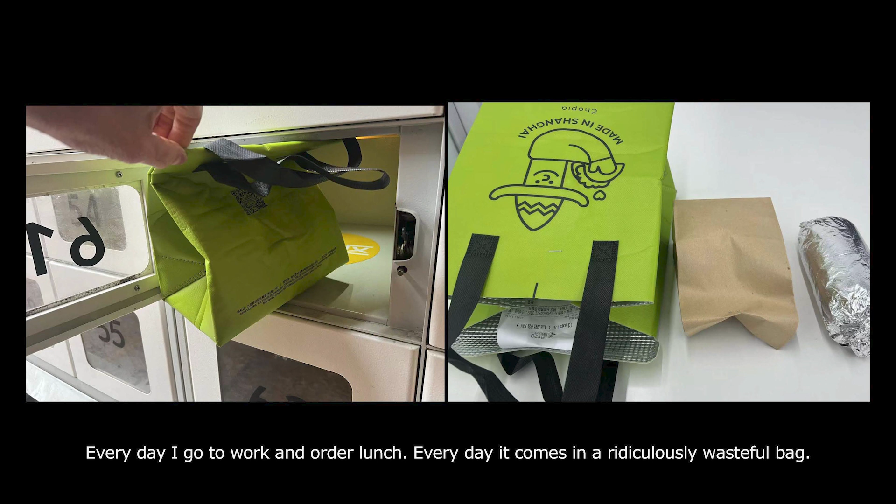I feel guilty. Every day, I feel guilty about waste. It is everywhere. Personally, I create so much of it. Every day I go to work and order lunch, and every day it comes in a ridiculously wasteful plastic bag. When I ride on the airplane, I wake up to this meal, and I can tell I'm not alone in my guilt.

Our lives are full of graphic symbols and inaccurate labels to make us feel less guilty. We pat ourselves on the back to just get the waste in the bin. But where does it really go? I needed to find out.

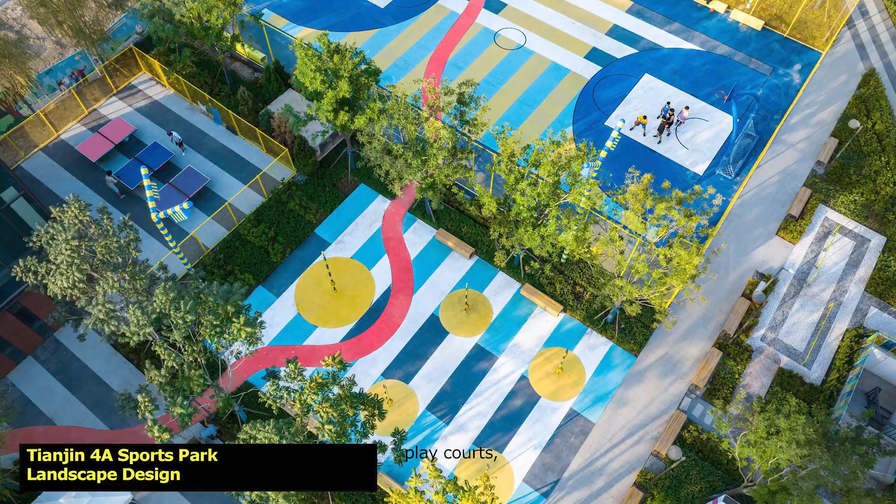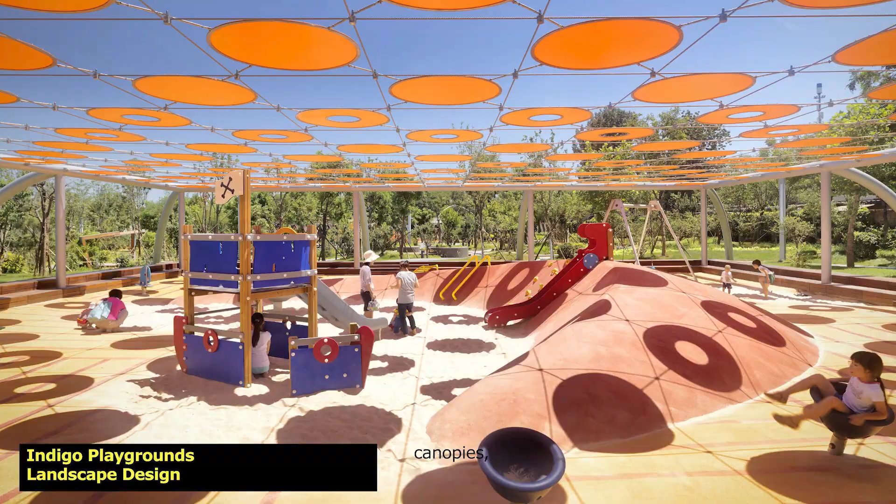In 2018, my company and I began to work on the problem of waste. We are a landscape and architecture studio called Ballistic Architecture Machine, or BAM. We are architects, landscape architects, artists, designers, and we try to be good business people. Our studios are in Beijing, Shanghai, and New York. For the last 15 years, we have designed parks and pathways, plazas, play courts, waterscapes, neighborhood parks, amphitheaters, landforms, slides, playgrounds and canopies, facades, tea houses, waterways, parterres, gardens, and allées.

Why should landscape architects deal with waste? It's a good question. Why is it even remotely our responsibility? To answer it, I want to go back to Frederick Law Olmsted, also known as the father of American landscape architecture. I want to look at a project we all know, Central Park.

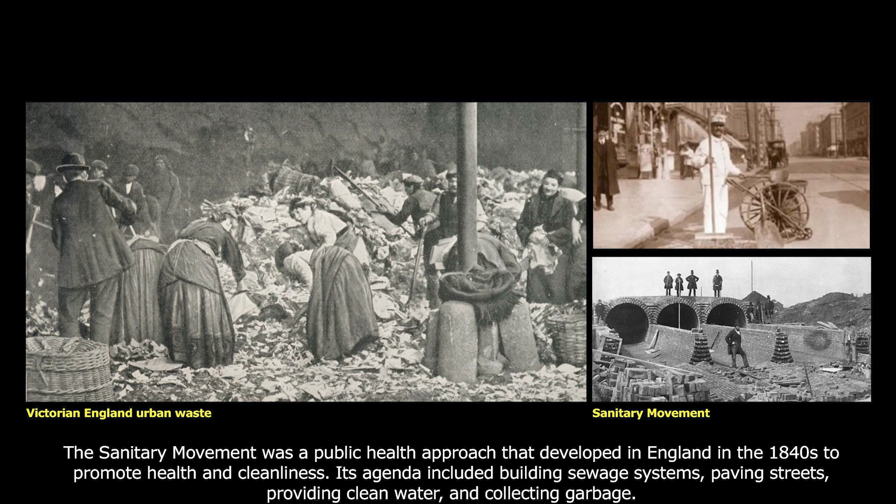What you may not know is that the existence of Central Park and Olmsted's design justification is a direct offshoot of the sanitary movement. The sanitary movement was a public health approach that developed in England in the 1840s to promote health and cleanliness. Its agenda included building sewage systems, paving streets, providing clean water, and collecting garbage. This is a quote from Olmsted's writing in his book called The Highest Value of a Park: Parks are now as much a part of the sanitary apparatus of a large town as aqueducts and sewers. Their management should be as much a matter of sanitary economy and as rigidly subject to sanitary tests.

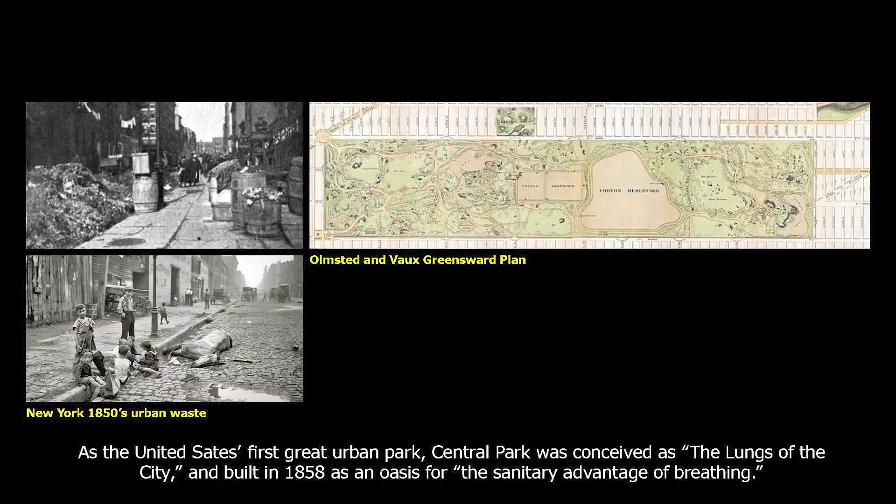As the United States' first great urban park, Central Park was conceived as the lungs of the city and built in 1858 as an oasis for the sanitary advantage of breathing. We associate the natural image of the park with our job of landscape architecture. But we should not forget Central Park's raison d'etre, solving humble problems of urban sanitation. So, Central Park, and even the foundation of landscape architecture as a profession in the United States, was born out of the sanitary movement. What of our purpose?

For landscape architects, I question if nature has become an ends in itself. Have naturalism and design with nature distracted us? We have to admit there is a contradiction here. Our naturalism requires manuals, learned gardeners, continual maintenance. If naturalism takes so much work to get right, are we pursuing the right idea of nature?

This is a quote from a thinker called Timothy Morton. The concept of nature has obviously not served us well. If it had, we wouldn't be here. Here, meaning planet Earth, at this moment, the moment of global warming. If so-called nature and its balance and wisdom had been something that really functioned well as an idea, there would have been no way we would have burned all those fossil fuels and endangered all life on Earth.

When we say we love nature, we mean idealized wilderness. We take out the asteroids and earthquakes. This selective editing is a problem. When we say we can achieve ecological balance through the wisdom of nature, we are also avoiding the dirty, violent, and disturbing parts.

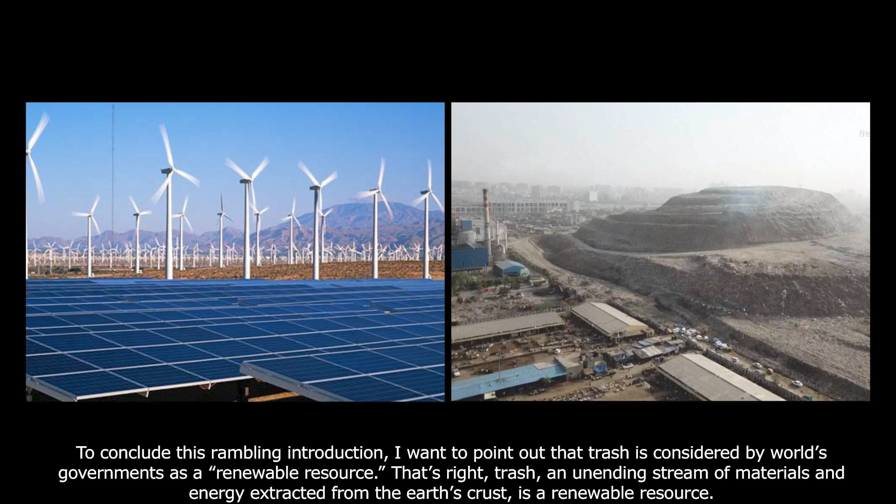To conclude my rambling introduction, I want to point out that trash is considered by world's governments as a renewable resource. That's right, trash, an unending stream of materials and energy that we extract from the Earth's crust, is a renewable resource.

Now I'm going to take you through 3 trash projects in which Bam and I have tried to take on some aspects of the waste problem. This is the first project. It's called Baoshan Waste-to-Energy Plant.

Our first opportunity to work on a waste project came in the form of a waste-to-energy plant, or what we call a WTE. WTE definitely has flaws. It is not an ideal solution, but this is a topic for another talk. Simply put, waste-to-energy works by burning the trash and using the heat to spin turbines which create electricity and transfer the heat into municipal heating infrastructure.

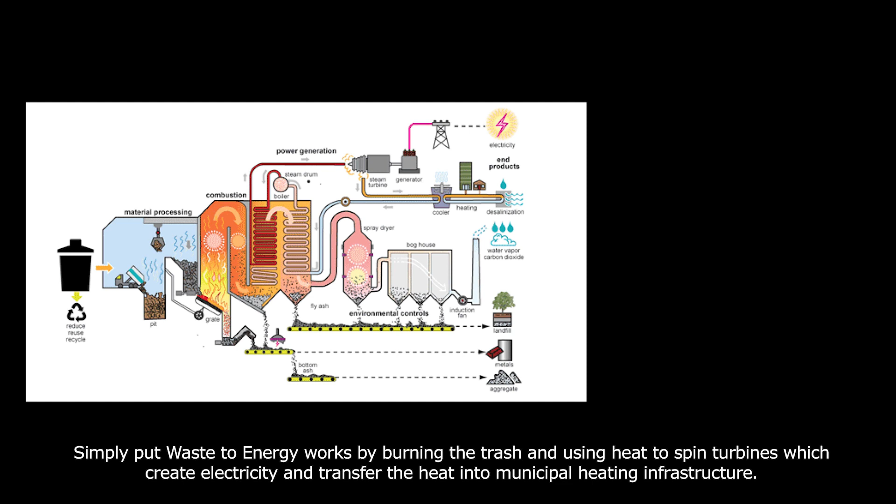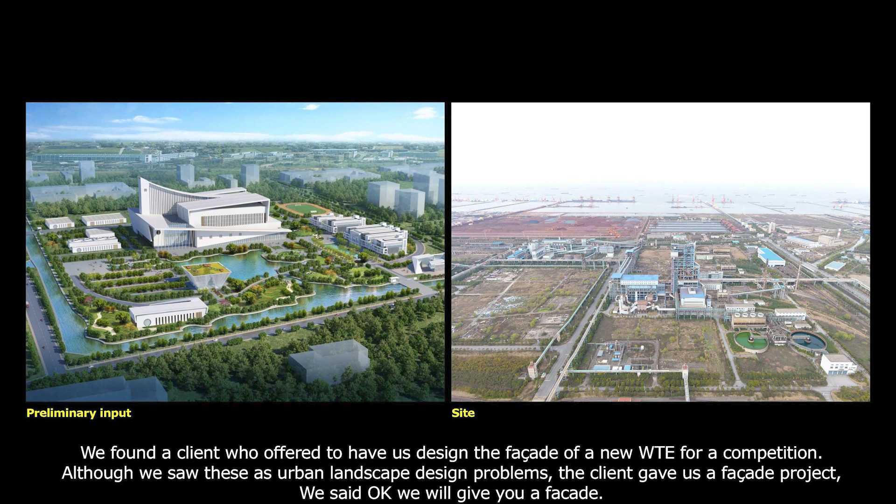We found a client who offered to have us design the facade of a new WTE for a competition. Although we saw these as urban landscape design problems, the client gave us a facade project. We said, okay, we'll give you a facade. So on the left you can see the preliminary input, and on the right you can see the site. So, of course, we started with Central Park.

We came back and said, this building does not look like a trash plant. It's going to need to be a park. We will reuse industrial structures on the site and add the new plant under the park. And we won the competition.

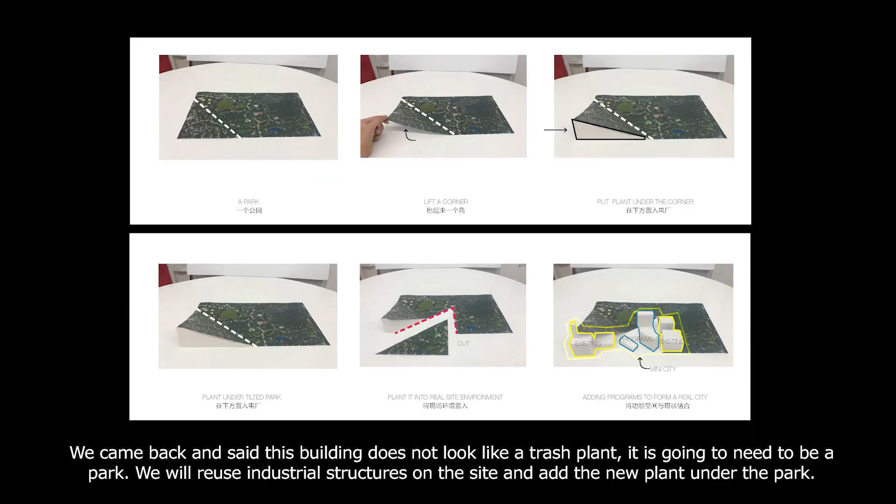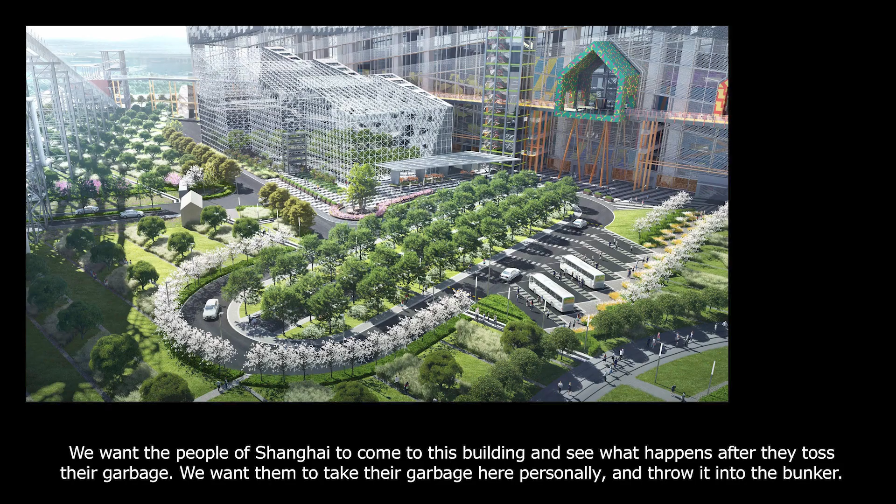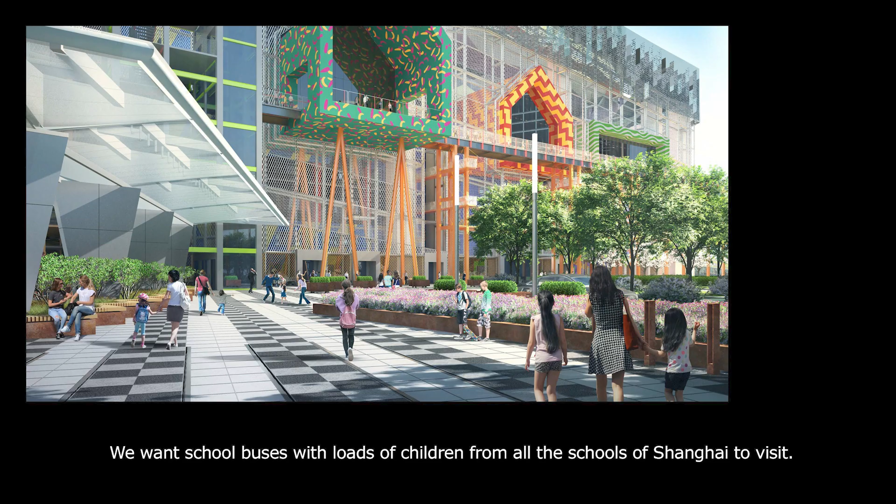After we started working on the park concept, we added an educational component. We wanted the people of Shanghai to come to this building to see what happens after they toss their garbage. We started to envision a mini city of programs, a museum of waste. We want school buses with loads of children from all over Shanghai to visit this site.

So we reorganized the typical plant architecture to integrate 3 exhibition halls and a long glass hallway where guests can walk the length of the plant and observe the entire process.

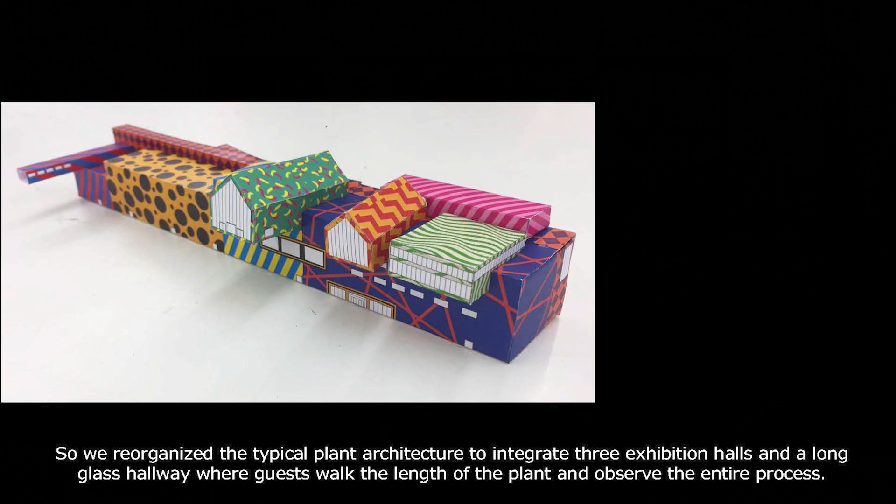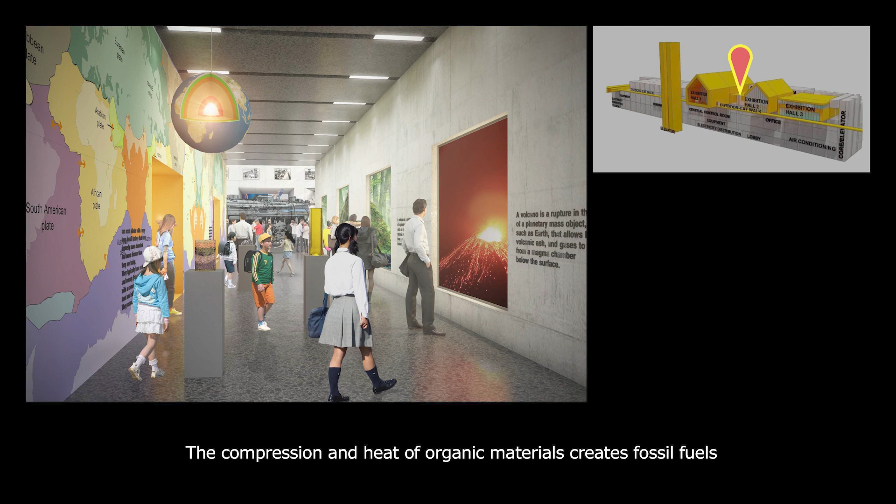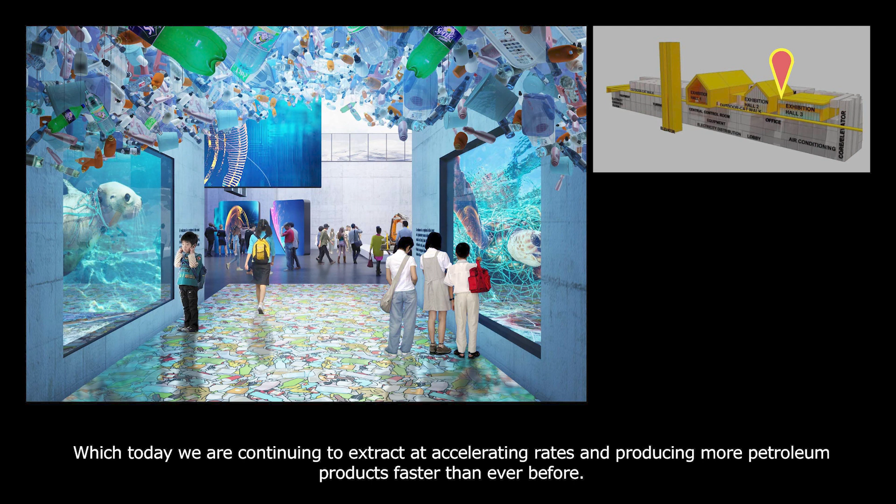Our Museum of Waste starts, as all good natural history museums do, with dinosaurs. The compression and heat of organic materials creates fossil fuels, which we begin to extract and exploit not very long ago, which today we are continuing to extract and exploit at accelerating rates, producing more petroleum products than ever before. We are moving towards a future which may or may not resolve our tenuous relationship with our biosphere.

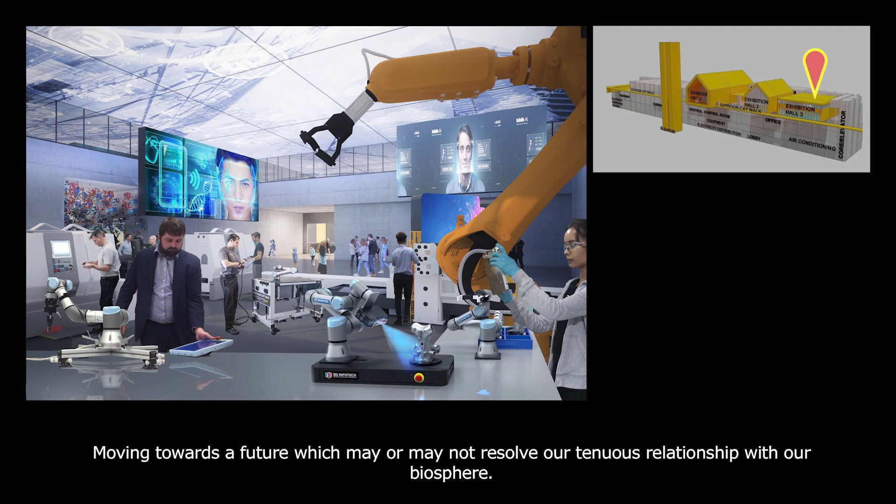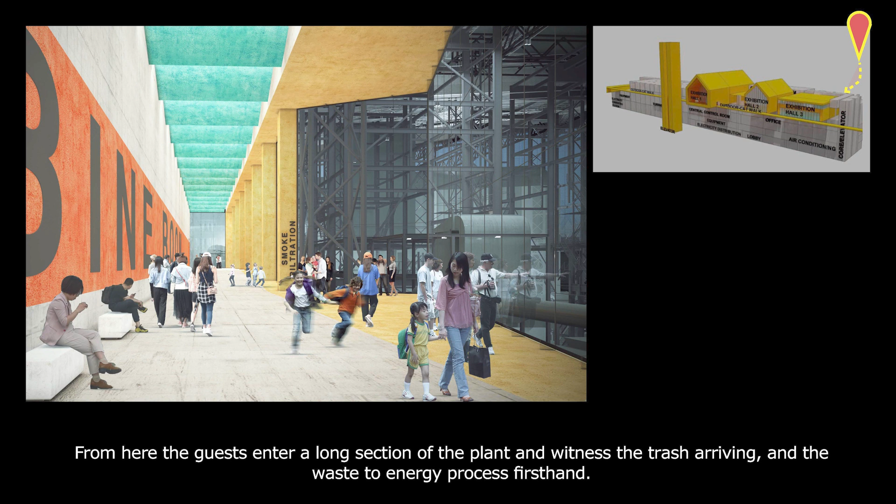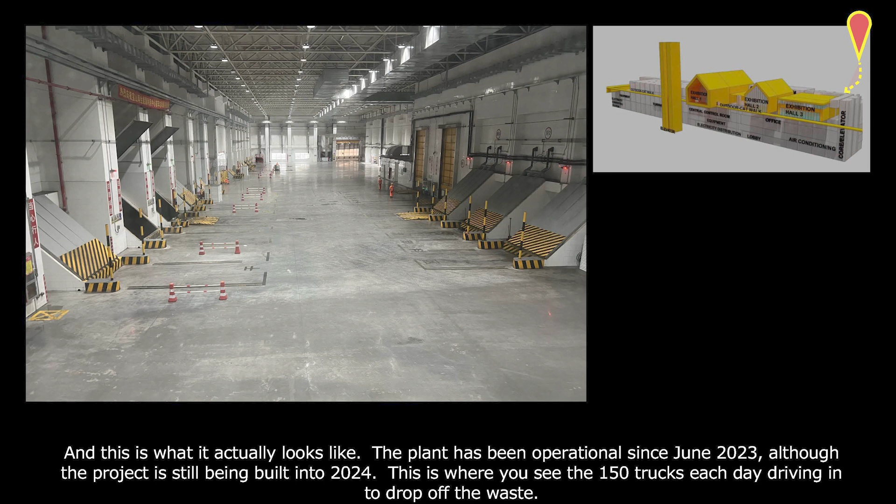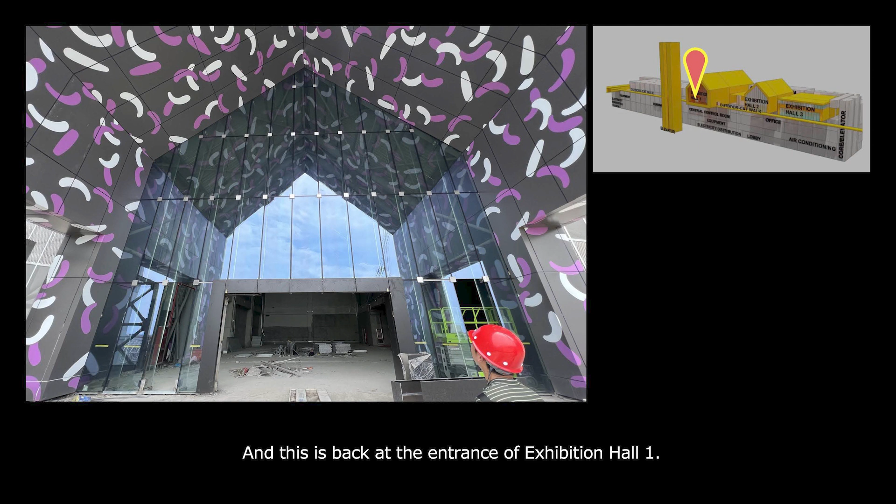This is where you see 150 trucks each day driving in to drop off the waste. This is overlooking the control room where the engineers monitor the plant. And this is back at the entrance of Exhibition Hall number 1. And this is a view of the protruding exhibition hall volumes connected by elevator and catwalk.

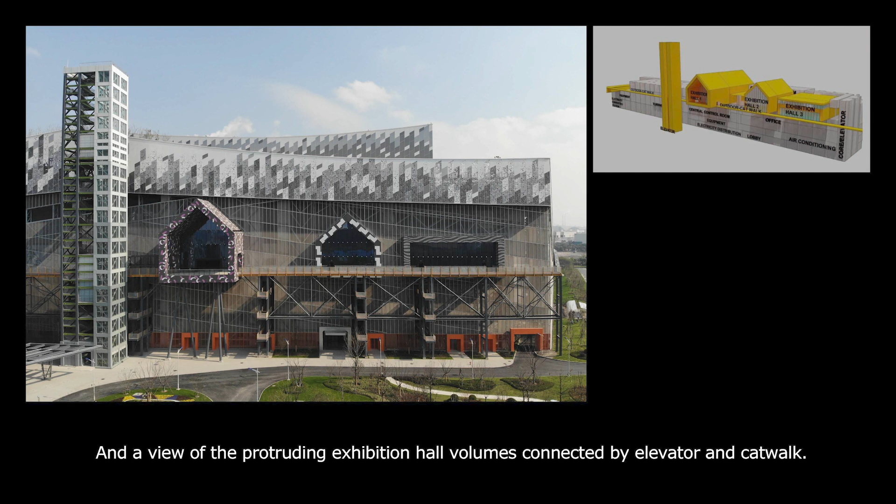To understand how the plant works, let's look at the master plan first. The park idea is overlaid over 2 plots. They're both 35 hectares, and the north plot contains the WTE. The roof has a long span area over the bunker and incinerators, which must be lightweight.

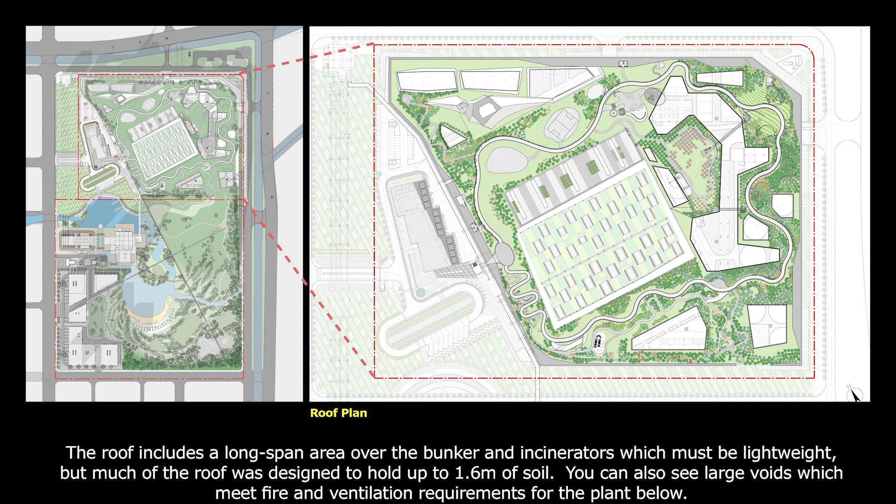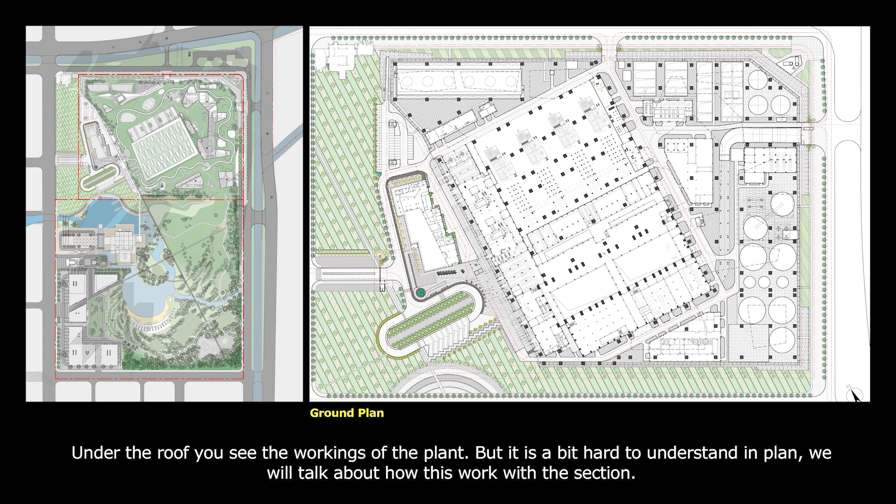But much of the roof was designed to hold up to 1.6 meters of soil. You can also see large voids which meet fire and ventilation requirements for the plant below. Under the roof, you will see the workings of the plant, but it's a bit hard to understand in plan. We will talk about this a bit in a section later. But first, here are some of the zones below the plant roof structure.

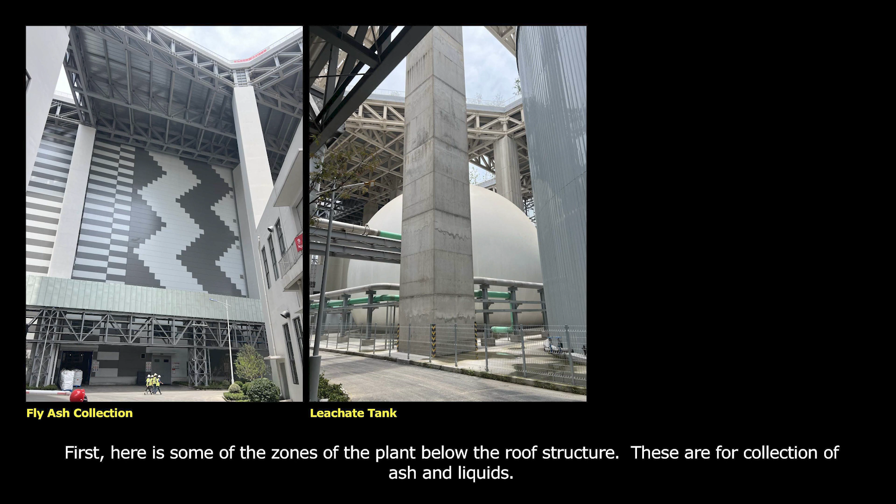These areas are for the collection of ash and liquids. The left image shows the late stage filtration before it's exhausted, and the right shows the chillers, and through the skylight you can see the chimney above.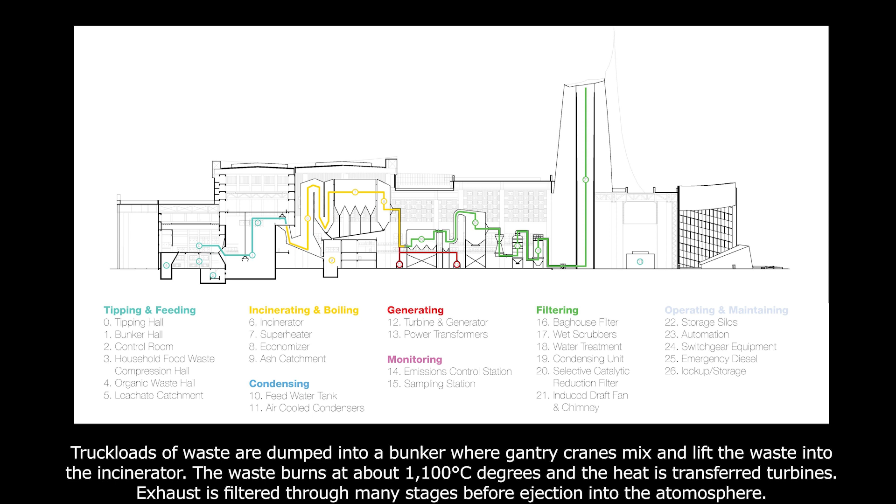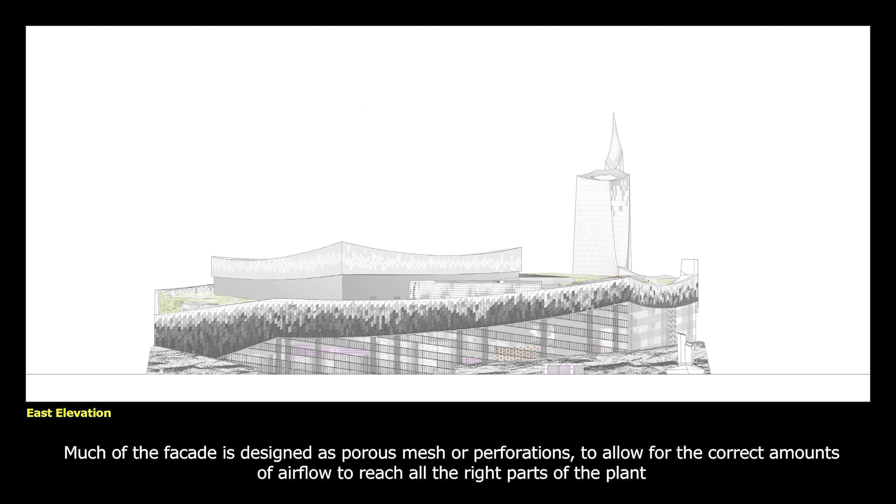We designed the facades of the project from the geological forms and patterns of the mountain-like landscapes. The guest-oriented programs protrude through the facade connected by a catwalk. Much of the facade is designed as a porous mesh or perforations to allow for the correct amounts of airflow to reach all the right parts of the plant. Here you can see the transition of the facade materials and their transparency.

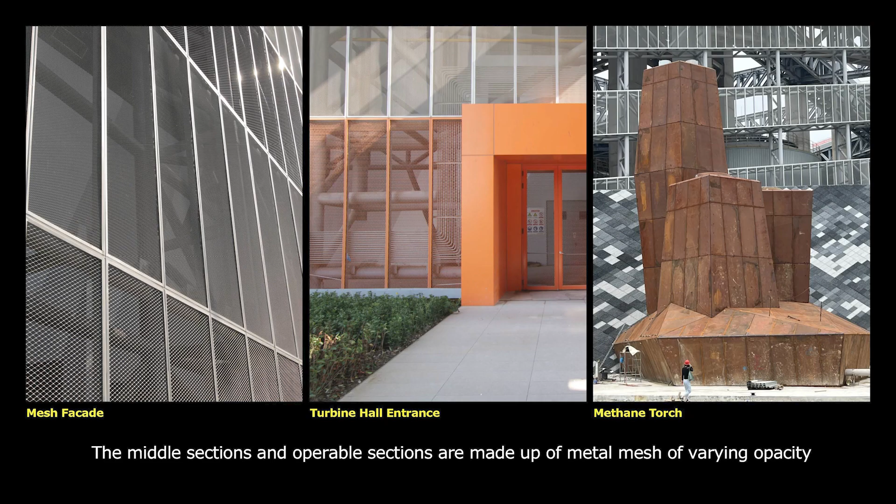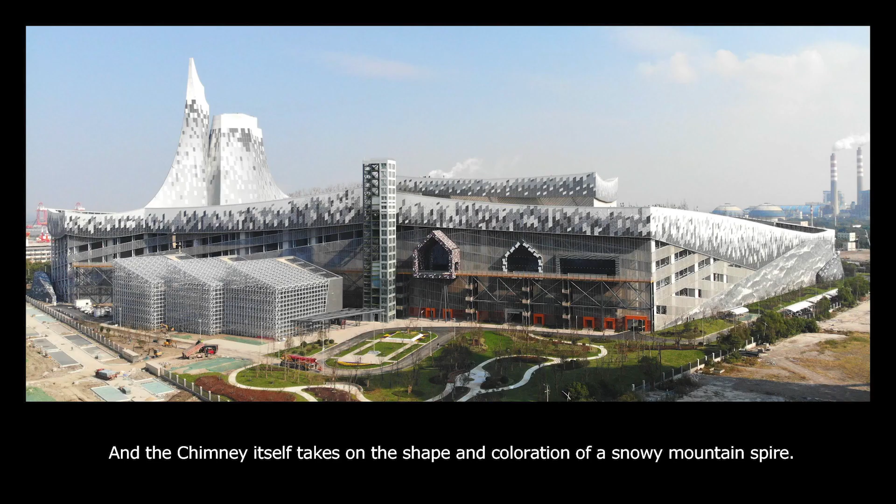The base is made up of a graphic pattern derived from mountain ranges, and it's rendered in cast concrete panels. The middle sections and operable sections are made up of metal mesh of varying opacities. The top section is perforated aluminum panels simulating a snow-capped peak, and the chimney itself takes on the shape and coloration of a snowy mountain spire.

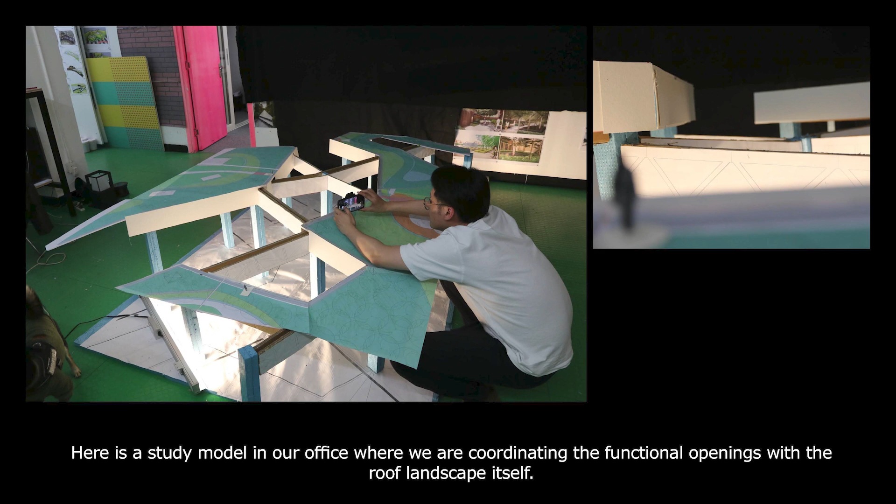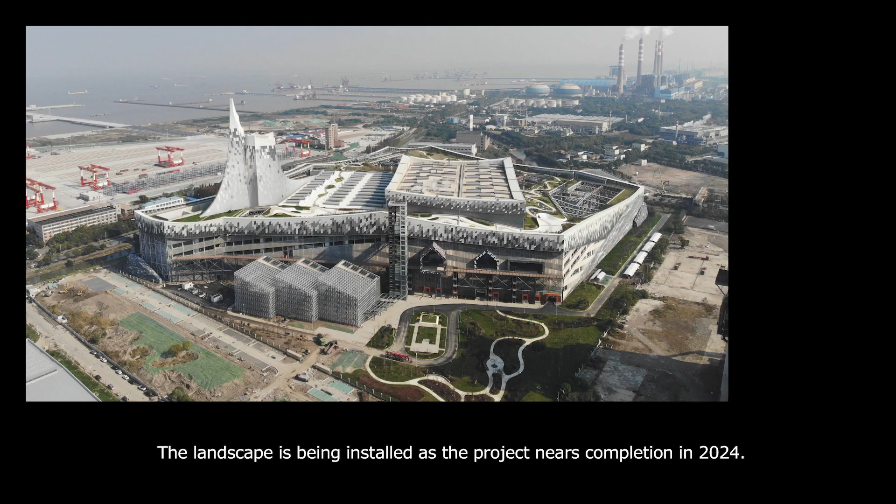BAM did a great deal of study to design the roof structure to withstand loads suitable for large canopy trees. Here we are in the studio studying a model, coordinating the functional openings with the design of the roof. We were able to work with engineers at Arup to come up with a frame solution and decks that met the many requirements of the plant below to be able to design the top landscape layer. The landscape is being installed as the project nears completion in 2024.

The Baoshan Waste-to-Energy project was born from the concept of creating a recreational park as opposed to a waste plant. Ultimately, the project aims to attract future generations to this site so they can smell, touch, and see the role that waste plays in our planet's natural history.

The next project I'm going to speak about is called a circular economy park.

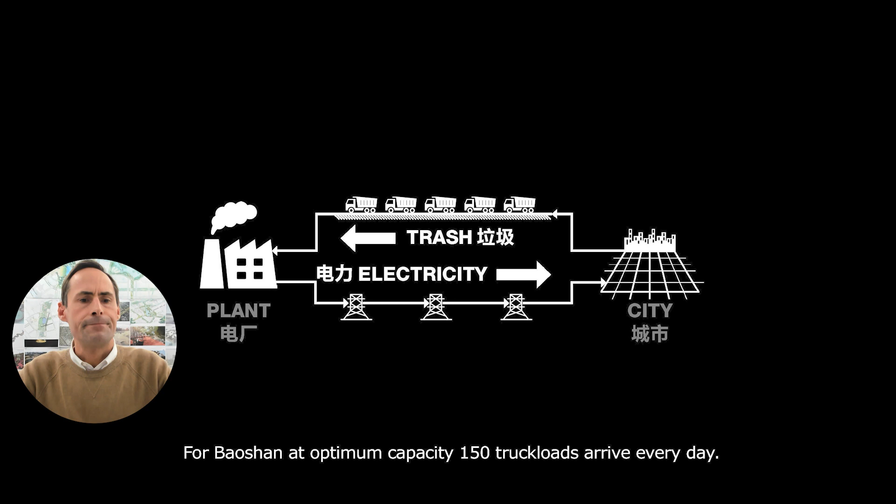Thinking seriously about ecological balance, we learned a lot from Baoshan. Putting a WTE on the outskirts of the city is just not as good as getting it closer to the source. For Baoshan at optimum capacity, 150 truckloads arrive every day. Trucking the garbage is dirty and wasteful, and the transmission of power back to the city center is inefficient. In addition to the CO2 and energy loss, we break the cycle of the source of the trash and its recovery.

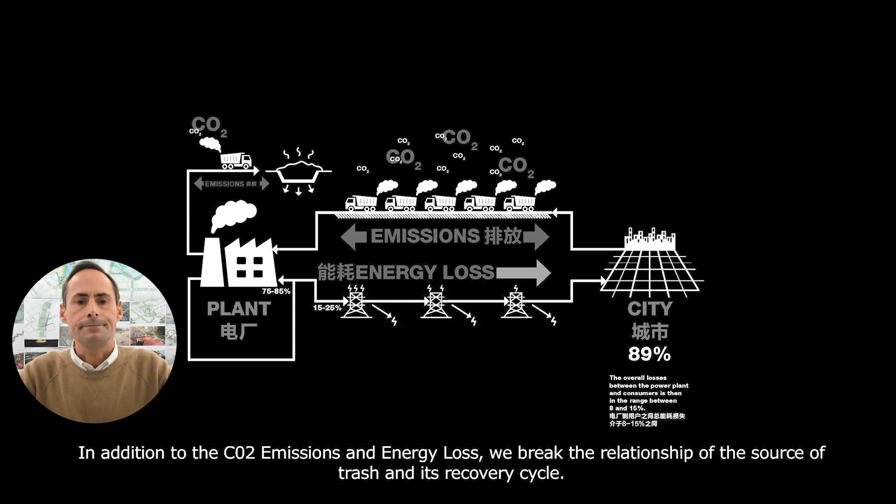We began to seek problems where we could position the WTE closer to the source. The benefits are huge. We found another operator trying to create a WTE for another site which is located within the fifth ring of Beijing. While this is not downtown, it is a central point of millions of residents, a good start to centralizing at a source.

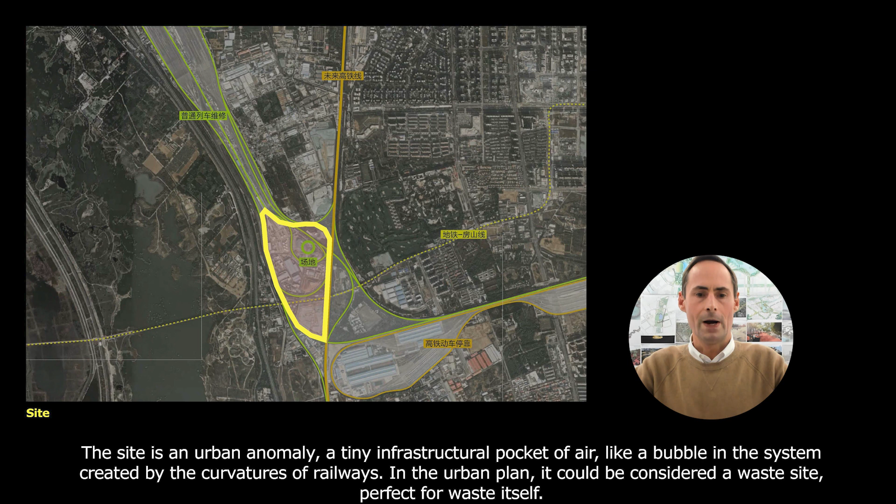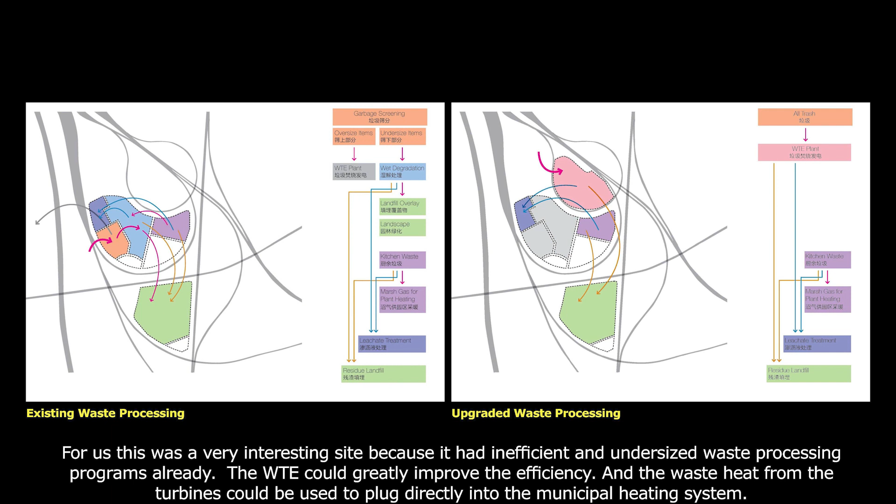The site is an urban anomaly, a tiny infrastructural pocket of air, like a bubble in the system created by the curvatures of railways. In the urban plan, it could be considered a waste site, perfect for waste itself. For us, this was very interesting because the site had already been built with inefficient and undersized waste processing programs. The WTE could greatly improve the efficiency and the cleanliness. Plus, the waste heat from the turbines could be used to plug directly into the municipal heating system.

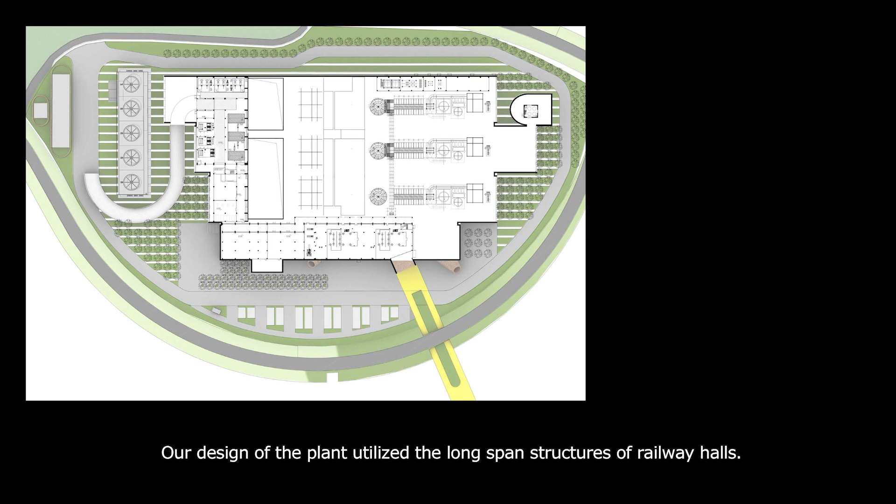We knew camouflage would be key. So we said, let's make this WTE fit into the surrounding railway context. Let's make it into a train hall. Our design of the plant utilized long span structures of railway halls to create a plant which from the outside may appear as a museum or a railway center. The exhibition and guest programs are brick, like some of Beijing's best museums. And viewed from the surrounding roads and rails, the roofs appear as long train sheds.

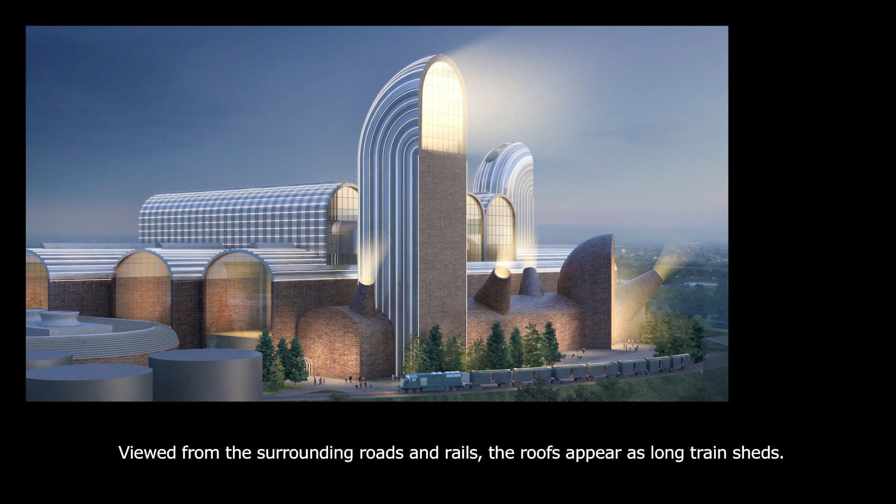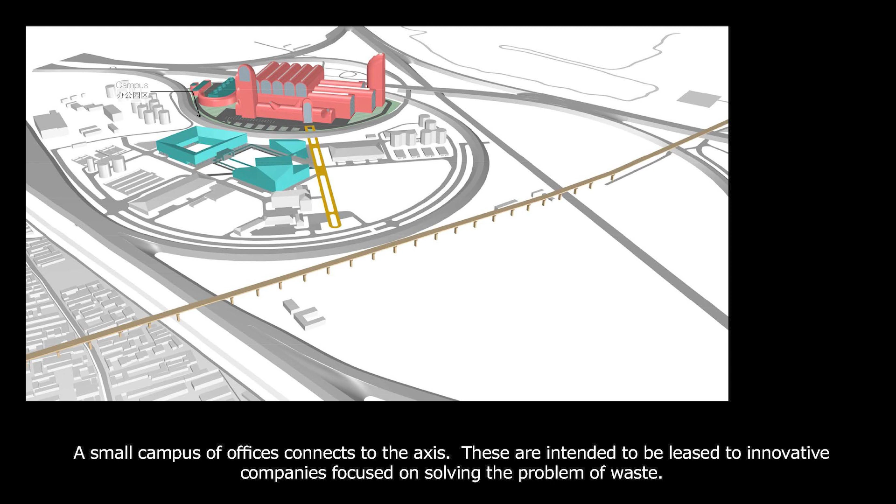Now, the best part, the landscape. We designed the WTE architecture to plug into a new axis we carved through the plot. A small campus of offices connects to the axis. These are intended to be leased to innovative companies focused on solving the problem of waste. The Floating Exhibition Center gives resident businesses a common show space and meeting point, and the axis terminates in a sports park built over the former landfill site.

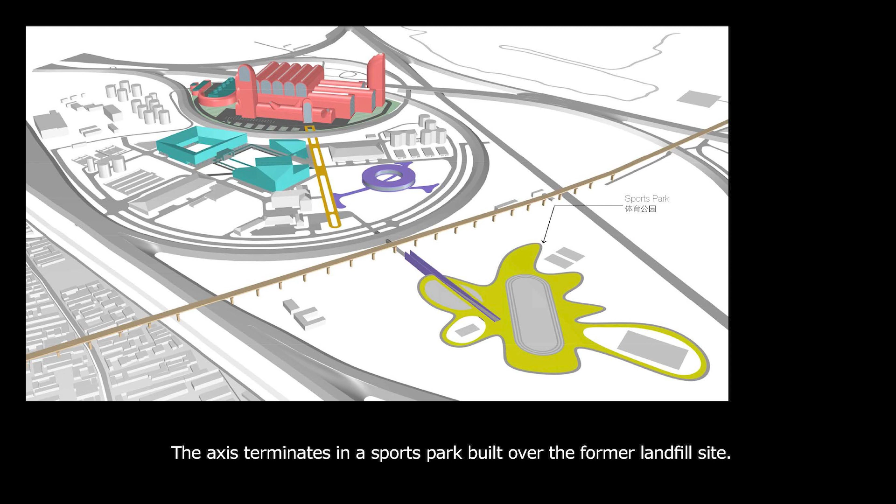We bring in the groundscape and the middle layers to reinforce the spatial design, and finally the canopy layer of the trees. And we arrive at a trash supercenter. Here, trash is a resource sorted for reuse, recycling, and energy extraction. Office and workshop spaces are created to foster creative companies working on waste problems.

And then the whole thing stopped. We literally ran into protests. Nearby residents had learned about the project and were very concerned about the proximity of the waste to their homes, for valid reasons. People were actually brave enough to protest the project. At this point, it was not really possible to communicate why the WTE is actually better than the current outdated waste management happening at the site. People hated the idea of this in their backyard.

We had reached the point that locating the WTE in the city center is not only a technical problem, but also a messaging problem. And this is why design needs to play a role in the waste problem. Sanitation engineers are not trained to deliver compelling messaging, as designers are.

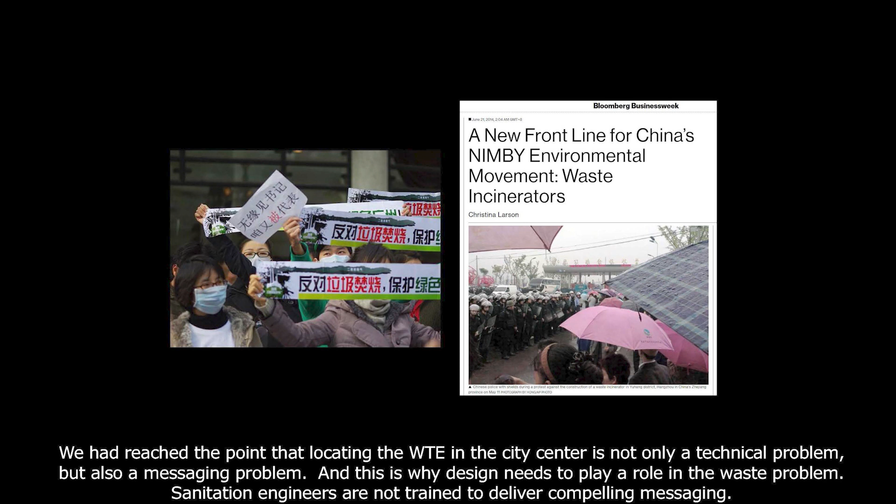When people protested locating a WTE within the fifth ring of Beijing, we said, okay, you don't like it there. Fine, we're going to try to put it in the center of the central business district then. This brings us to our third project, which is entirely theoretical: a waste-to-energy skyscraper.

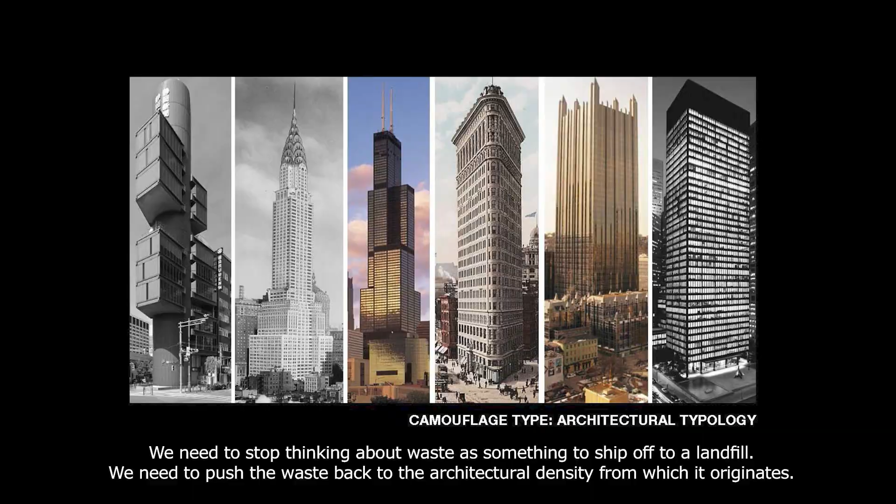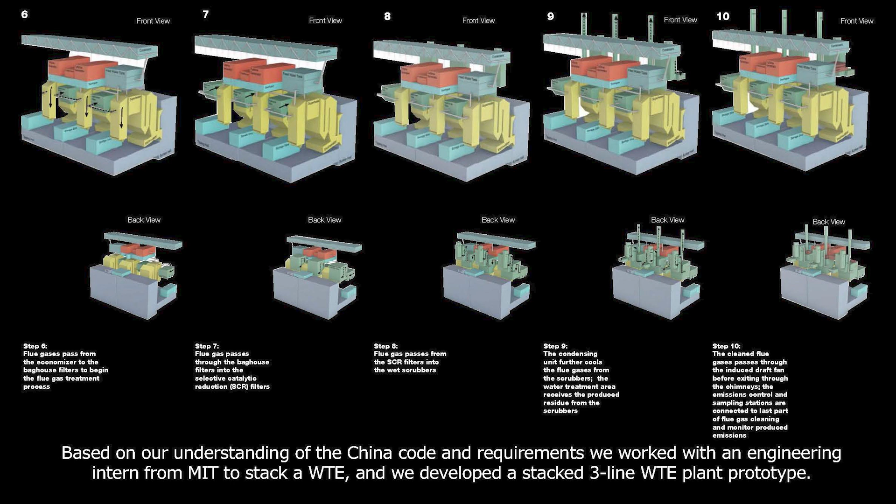We need to stop thinking about waste as something to ship off to a landfill. We need to push the waste back into the architectural density from which it originates. We found some academic work on this topic where the waste-to-energy components are configured for stacking, and we got to work. Based on our understanding of the China code and requirements, we worked with an engineering intern from MIT to stack a WTE, and we developed a stacked three-line plant prototype.

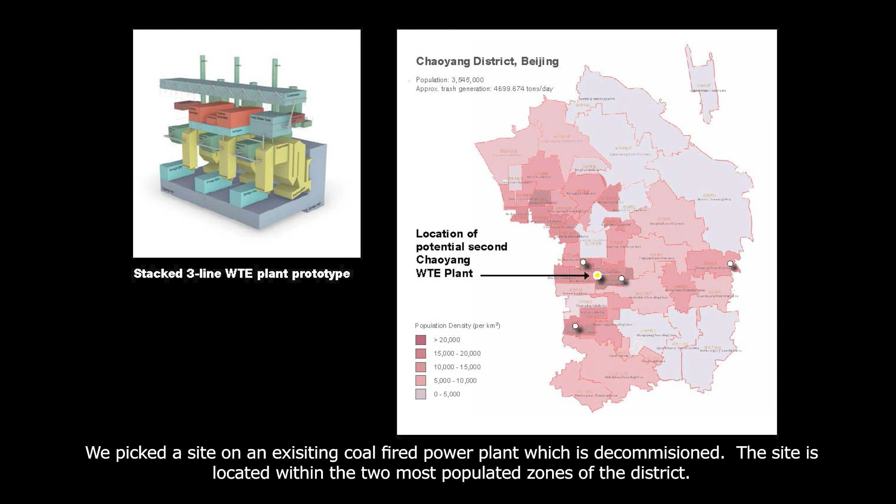We picked a site in an existing coal-fired power plant, which is decommissioned. The site is located within the two most populated zones of the district. But more importantly, the site has been designed as the future of the central business district, home to gleaming skyscrapers. So we took our stacked three-line plant and inserted it into the new business district model.

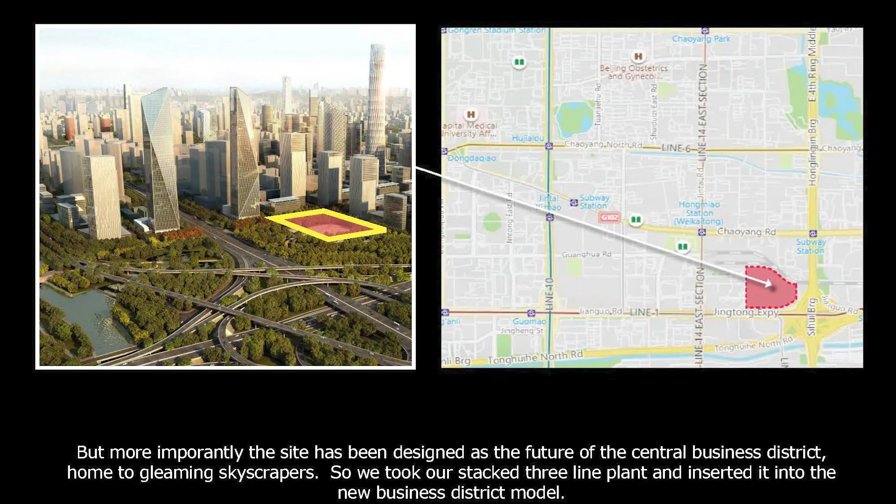I am showing you this image because it represents the limit of engineering. This is as far as the engineer could get in the problem. It is an incredible accomplishment. But to make this a compelling argument, we needed designers to create a vision for this idea.

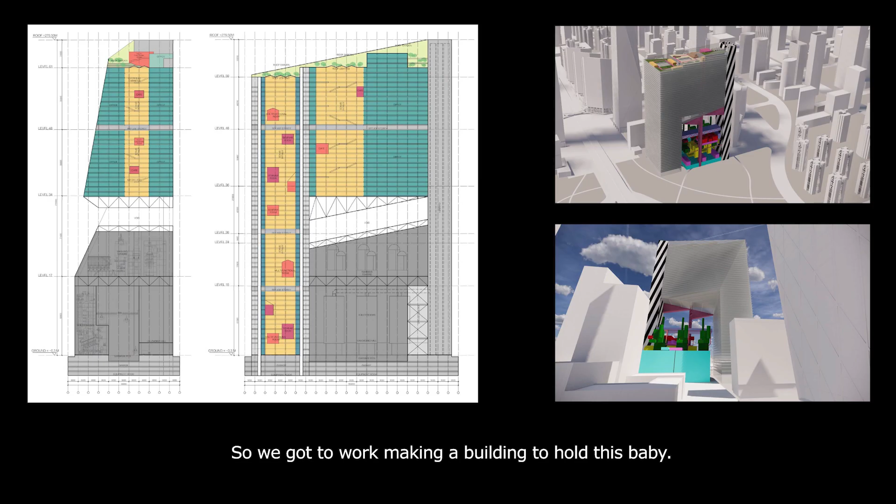So we got to work making a building to hold this baby. On the left, you can see some of the sections where the WTE plant is in gray. And here are some of the basic floor plate types, from the WTE plant to the office floors to the roof garden on the right.

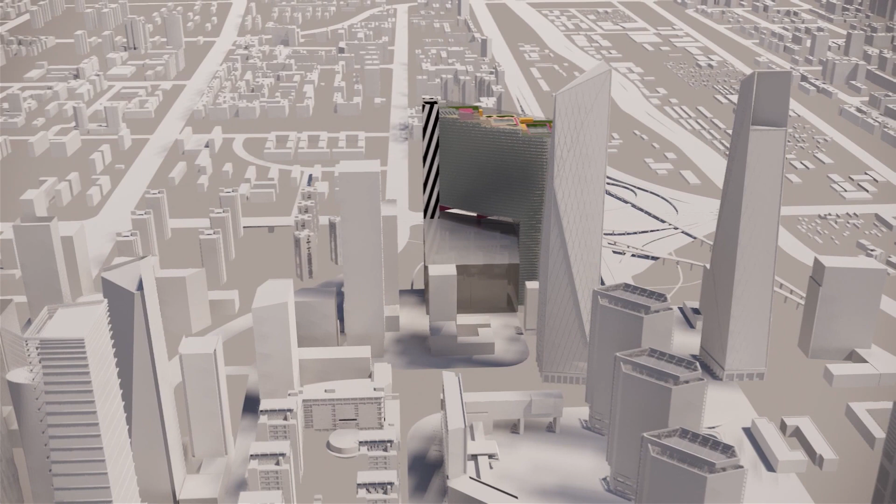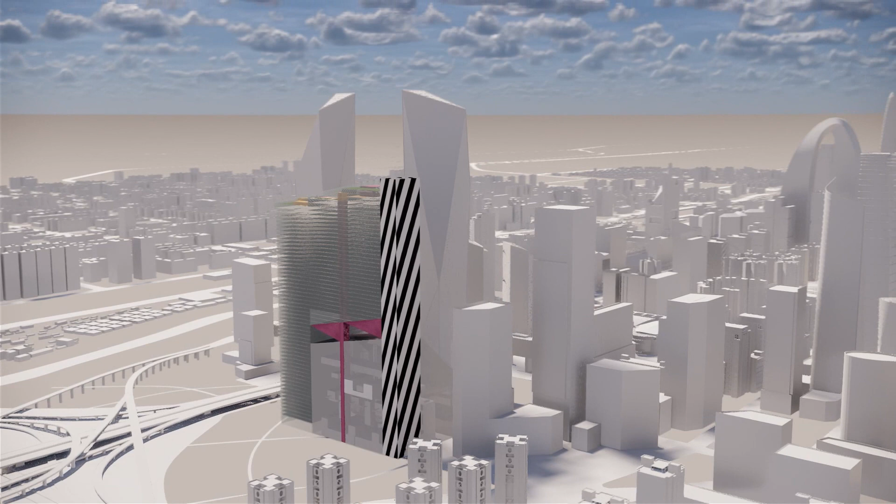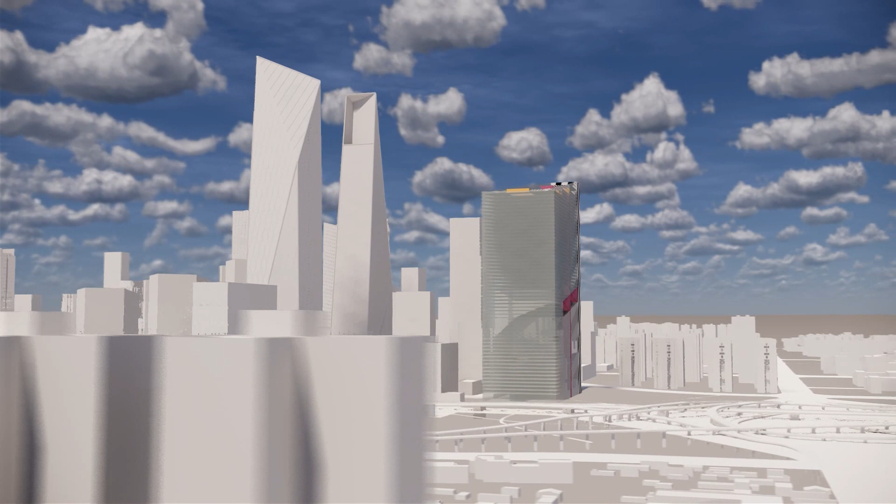This project represents our negotiation with the public. We all wish for waste to disappear, but unless we actually confront the dirty problem, we will never develop a sustainable relationship to waste. To think about it another way, we are landscape architects trying to design the waste out of the landscape fringe, trying to push it back into the architecture of the city core. If the waste we produce is dealt with at hand, if we see it as a gleaming edifice, and we hand our trash almost directly to the machine of the WTE, will we start to develop a healthier connection to our waste? Will our city become more natural by processing its own waste?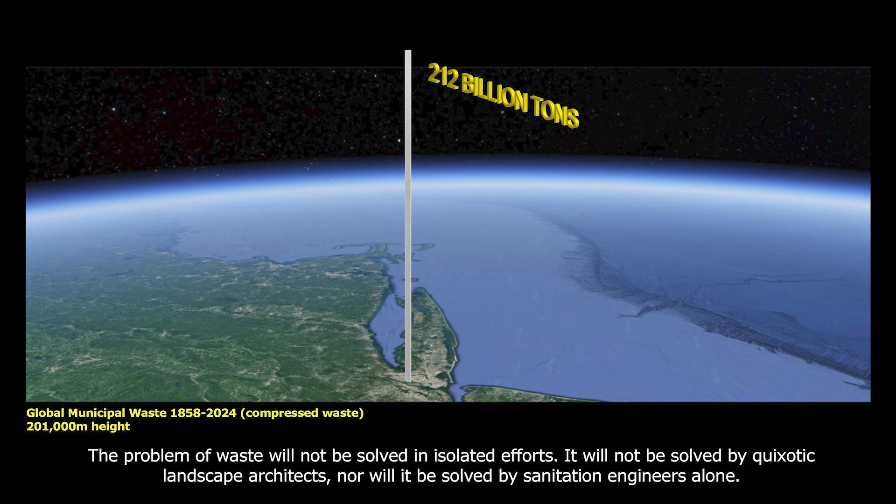The problem of waste will not be solved in isolated efforts. It will not be solved by quixotic landscape architects, nor will it be solved by sanitation engineers alone.

However, I hope this talk has encouraged you, the landscape architects of India and Asia, to consider the roots of our profession in solving humble and maybe dirty problems. And I sincerely hope that we can work together to develop noble solutions to these very worthy problems. Thank you all for listening, and I look forward to our discussion.